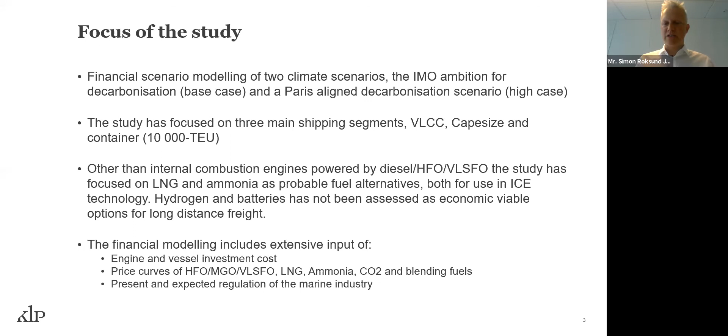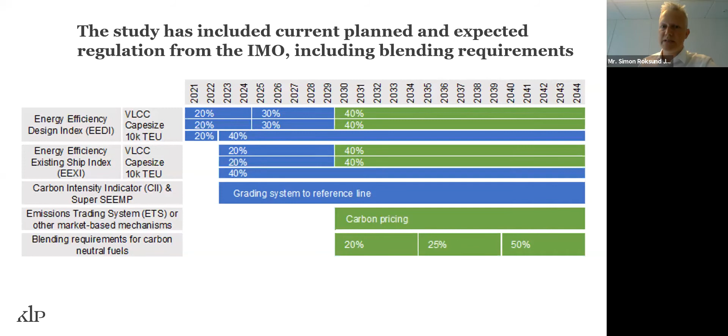And we also did extensive work together with the Norwegian Department of Environment to look at what kind of regulation we expect. And we will start with the regulation. What you see in blue here is the regulation we know, the regulations that will be introduced in the next 5 to 10 years, which is the debated EEDI, EEXI, the Super SEEMP, and so on. So they are all marked in blue. This is regulation that is coming. We know that for certain, and it will be introduced to the fleet as it is. This is included in the modeling.

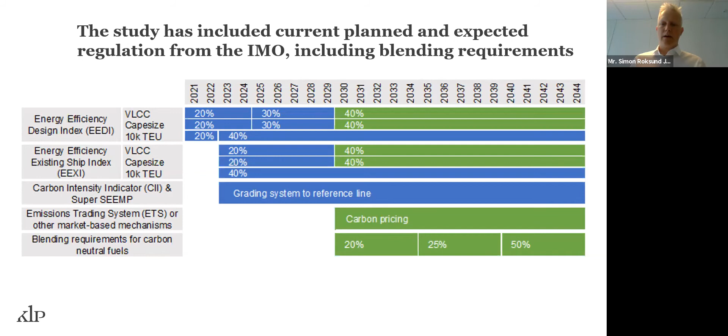Then we also included likely regulation that we think will come from 2030 and onwards, which includes tougher design index measures for EEDI, EEXI, and we also included global carbon pricing from 2030 for the fleet, and also a blending requirement with carbon neutral fuels.

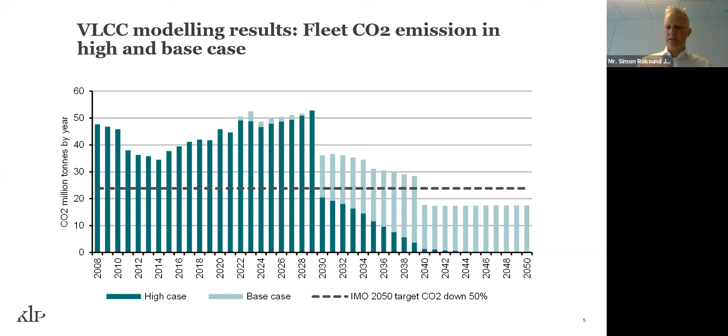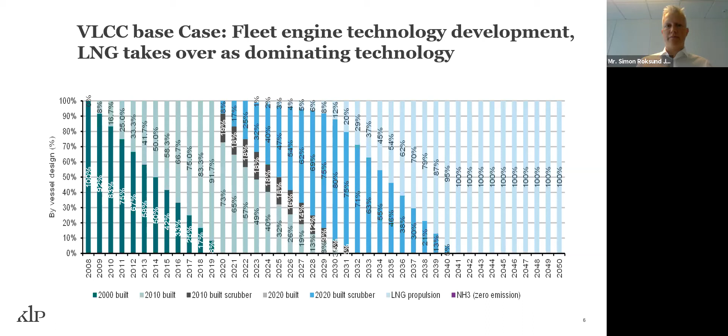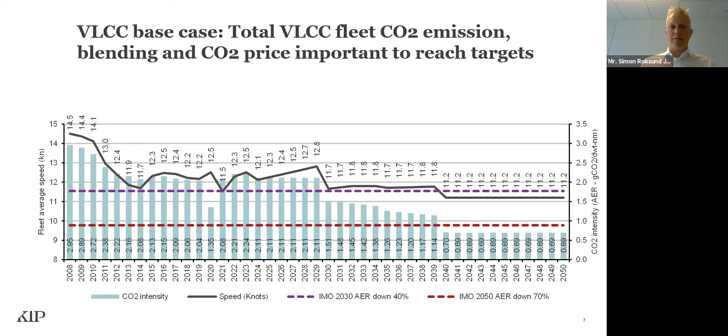Here you see in the base case the speed development, and what I want to mention here is as tougher environmental regulation is put in, also in the base case, you see the speed is coming down. Blending fuels are expensive, so it's also forcing the speed of the fleet down, and you see that we come into compliance with the IMO target towards the end of 2040 with LNG and an LNG-powered fleet. So this is for a 50% cut.

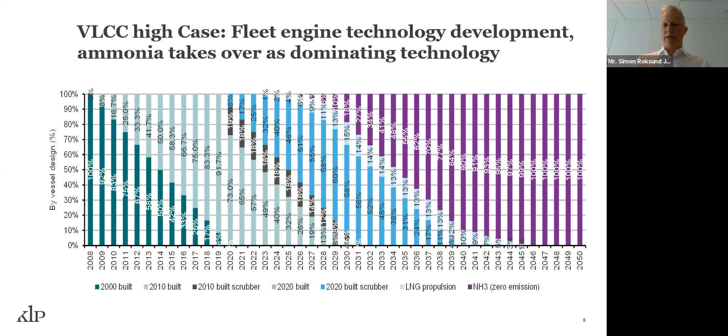So ammonia vessels are then taking over in a high case where we need to do a much tougher cut on emissions. So first we see the scrubber vessels being phased out, then LNG has a small step in, but the main technology dominating is ammonia.

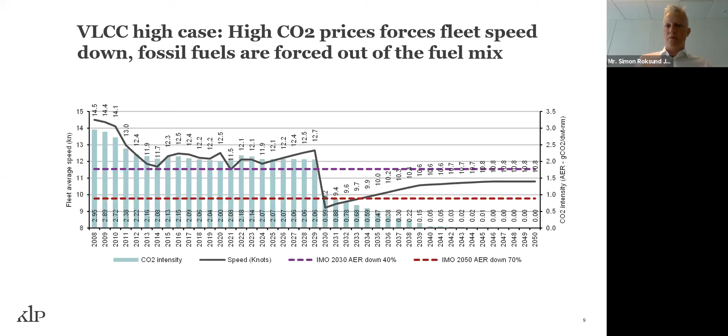You need to slow down, your vessels become uneconomic, and as you then introduce green vessels from 2030 and onwards, the speed slowly increases, but only on these vessels, so the average speed is not on full 11 knots before the whole fleet is green.